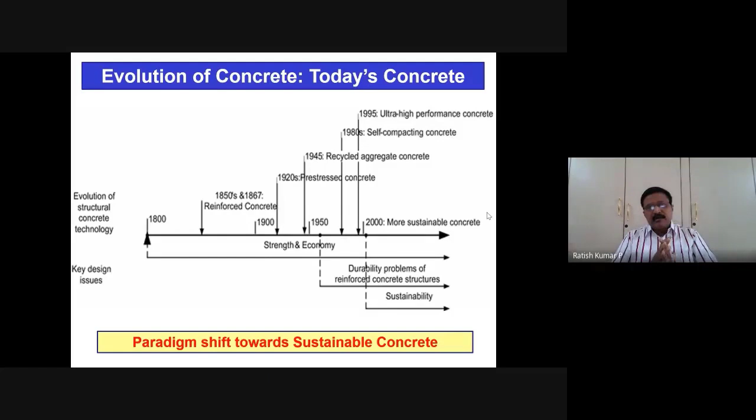Okay. So all I want to say at this point in time is that there is a very good paradigm shift from a strength-based design to durability-based design to a sustainability-based design, and all these three things are going to form something like different vertices of a triangle. Like, the strength is important, the durability is important, the sustainability is important, but I don't say it's an equilateral triangle though. Okay, so let's just go further.

Now, the definition of sustainability, as everybody starts with it, I just try to put in my point from the sustainability point of view. We know that a very common definition of sustainability is the development that meets the needs of the present generation without compromising the ability of the future generations to meet their own needs. So this is a very prominent and very common definition, which is from the Brundtland report. So if you talk in a very common man's language, it is something like जियो और जीने दो.

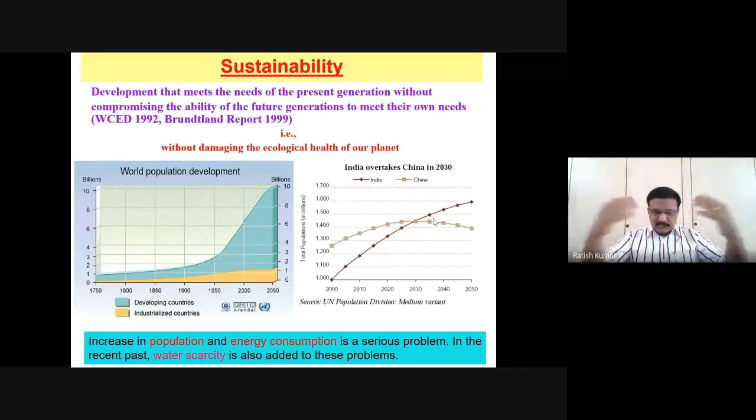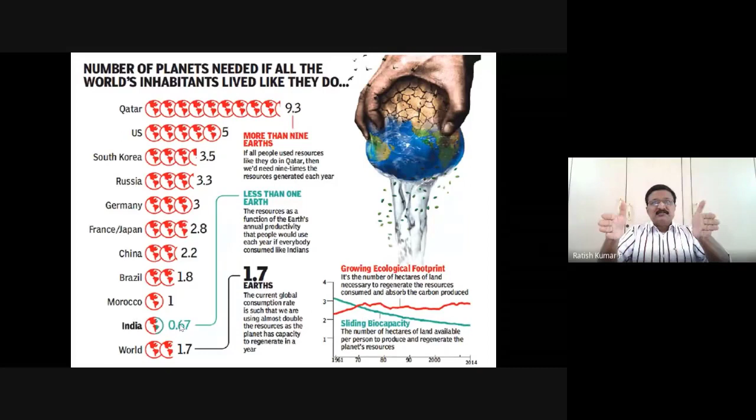So it's very important that we think about ways and means of reducing the embodied energy or the carbon footprint which we are creating with respect to all our practices, be it burning of fossil fuels, be it cement, be it air conditioners, be it all the different aspects. I'll come to that a little later.

Now let me talk about the embodied energy. Embodied energy is the energy which is required to bring a particular product into the market. Be it concrete here, as you can notice, be it steel or be it ceramics, it all depends upon how much energy you are expending to bring this particular product into the market.

And you can see straight away that if I'm talking about concrete, for example, the embodied energy of concrete is something like 220 gigajoules. That's a good number. If you see steel, it's 140 gigajoules. If you see ceramics, it's around 80 gigajoules. But if you see glass, it's less than 50.

But the point is, are we really ready to make an alternative to concrete? Can we completely do away with concrete? That is a question I'm trying to bring forth. Yes, the embodied energy seems slightly high, but when I calculate it with respect to the same amount of usage for aluminium or timber or anything like that, what will be its role? Let us bring that forth a little later.

Now, in addition to that, there is also an important concept called cradle to cradle or cradle to grave, which is something like circular economy. That's a very important aspect today whenever we talk about the concept of sustainability.

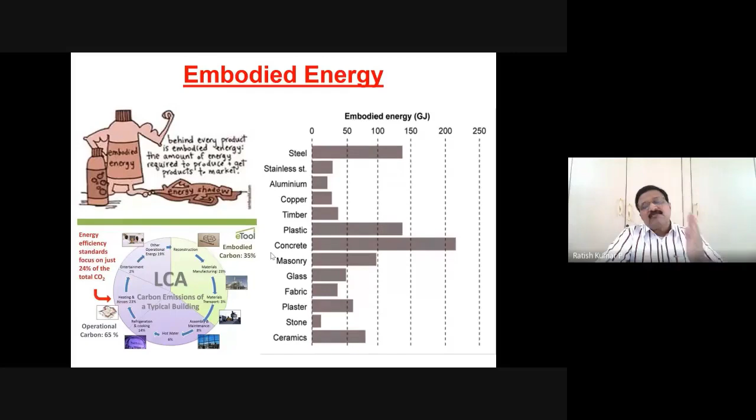And it is going to change with the topography. So it's very important that we develop our own embodied energy calculation for the materials which are available in our country. That's a very important aspect one has to keep in mind, a gray area of research for young budding engineers. Let me go further. Now, as far as the construction output is concerned, let me project the Indian scenario.

We are really growing very fast, and our country will be the second largest country in construction growth, I think, next to China. Because of the large population, the infrastructure growth is going to be there, and to tackle the growing needs of this population, the infrastructure grows, and when infrastructure grows, it also demands material.

So that's the point of confluence and juxtaposition which I'm talking about, with respect to the use of materials vis-a-vis the strength, the durability, as well as the sustainability. Now if you see our National Planning Commission, we have allocated something like close to $1 trillion for the next 5 years for the growth of infrastructure development.

There are several schemes which the government of India is coming up with with a very positive attitude. You might have heard about schemes like Amrut and Hriday. We have Pradhan Mantri Gram Vikas Yojana, Awas Yojana, and the topic itself we are talking about is smart cities, heritage cities. There are several other things like Swachh Bharat Mission. These are all going to give a good impetus to the entire growth of the nation.

And the entire growth of the nation is dependent upon the growth of infrastructure, and the growth of infrastructure is going to pose several challenges to us. We civil engineers are part and parcel of this growth, and that's why we are worried about the different ways and means of reducing the amount of carbon dioxide and the toxic substances we release to Mother Earth, so that the carbon footprint can be minimized. That's our idea.

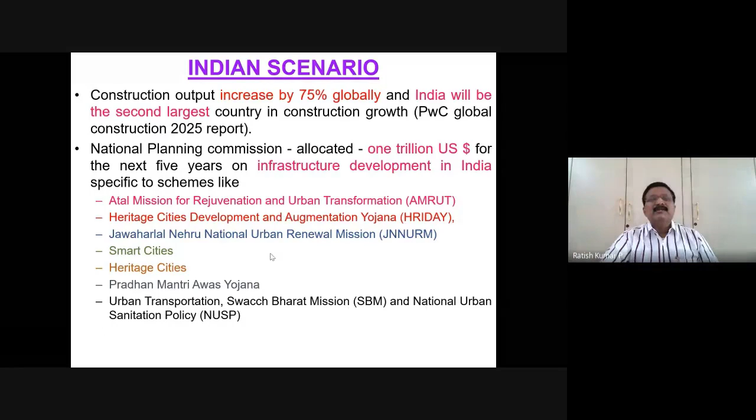Now, let me talk a little bit about cement production. Of course, you might have studied the production of cement. Some students are there, some research scholars are there. I just want to very briefly talk about this aspect. When you talk about cradle to cradle or cradle to grave, the production of cement passes through several stages.

We talk about argillaceous and calcareous materials, pre-calcination, and then the grinding and heating of these materials in the rotary kiln, passing through several temperatures: around 850 degrees centigrade for belite formation, 1300 to 1350 degrees centigrade for alite formation. The point is that in raw material preparation, a good amount of energy is expended. You are quarrying the limestone, which is a very important aspect.

As everybody knows, in clinker production the argillaceous and calcareous materials are burnt in the rotary kiln to a high temperature, and what comes out of the rotary kiln is called clinker. Then you quench it, take it to the ball mills, add certain performance additives along with gypsum, and you get the final finished product. So there are several stages involved.

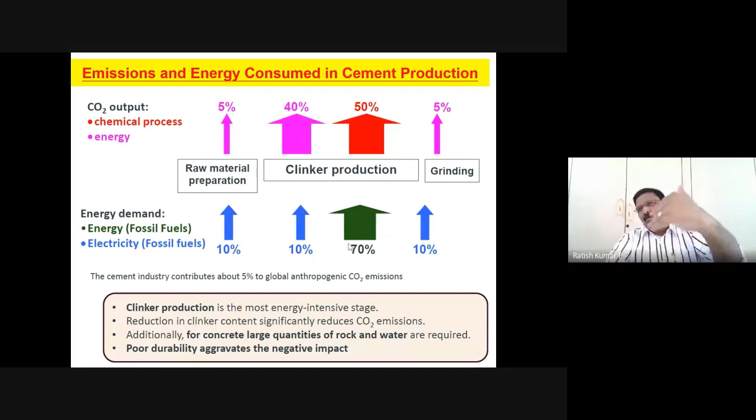So that's where we can try to put a check on the energy demand by probably reducing the fossil fuels, which are to the order of 70%, and then we can try to think of a replacement of this 70% with other waste wood or rubber tires, etc., in the rotary kiln for burning the materials, and probably we can try to get a good advantage.

Let me just try to go to the next one. If you see India's projected demand by 2047, you can notice that the total energy demand, for example, by 2047 is a good 18,125 terawatt hours. Now, the point of interest for us is, the buildings are occupying a good 2,287 terawatt hours, which includes everything.

It includes commercial lighting or heating, residential heating, etc. It involves all these things, and a good amount of energy is basically expended in the building. So can we try to put a check on this by using sustainable materials and sustainable technologies? This is the point of discussion in several levels of platforms where sustainability is being discussed.

At the same time, let me also try to project the demand for cement production. As you can see, the demand for cement production is from something like 450 to 600 million tons, a lower level of 450 million tons to upper level of 600 million tons. By 2050, the demand for cement is actually growing to 780 to 1360.

But the point is, as you can notice here, there is a huge increase in demand, and that's because of the increase in the growth of infrastructure, which should match the population requirement. This particularly is not so much in the OECD countries, but the demand for cement is more in China first, and then India. India is a developing country, so obviously we require a lot of cement. So that's the point here.

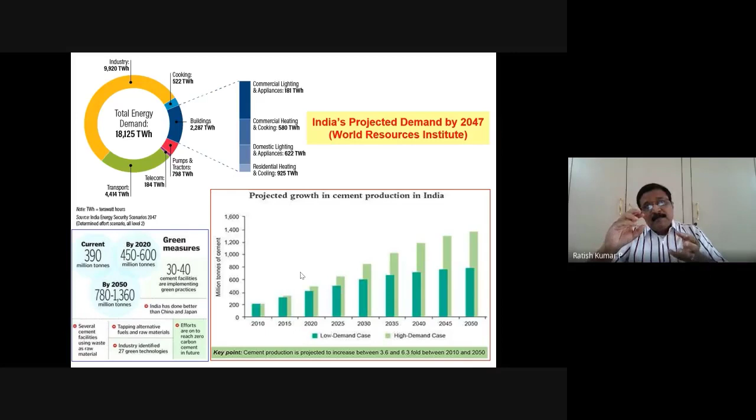But the important point I also want to say is, if you see the statistics I was presenting from the carbon footprint point of view, India is doing better. In fact, when compared to China as well as Japan, as I told you, our carbon footprint vis-a-vis the amount of 1.75 times of Earth, if you compare, ours is 0.67 times. Which means we are not really very low, but it's an alarm which should actually grow. But definitely we are better compared to the other developed countries. So that's good news for us.

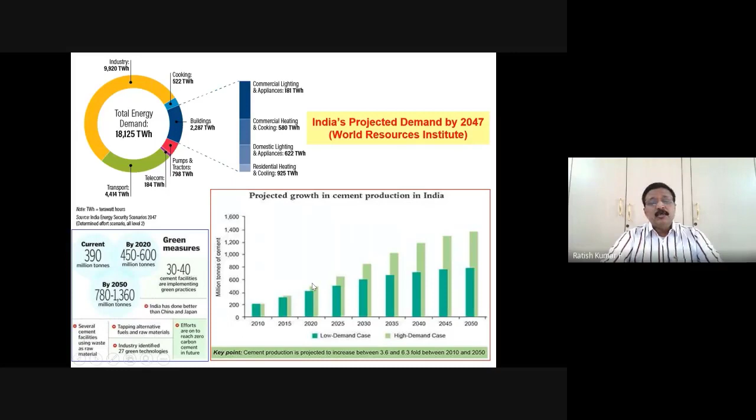Now, I said there is a growth of so much demand for cement. Yeah, that is true, because the growth of infrastructure is very high. But the point is, can we really look at the use of cementitious materials? You can see that cementitious materials are going to make up a good 30 to 50% of everything we produce. And as against wood, for example, as against ceramic, they are occupying very low amounts as compared to the amount of materials production per year. But this is because cementitious materials are occupying a very good role.

So can we really do away completely with cementitious materials? Can we really construct everything with wood? Can we really make everything with ceramic or iron or anything like that? The answer to this is a big no, because it's not possible. Wood is not available everywhere, and the material production of wood compared to cementitious material is very low. But the important positive point to notice is that the carbon dioxide emission, even though we are using materials of the order of 30 to 50% of everything we produce, the carbon dioxide emission is only 5 to 10%.

As against the amount of cementitious materials we are trying to use, the carbon dioxide emission is low, only 5 to 10%. So I don't think it's really a problem just from the use of cementitious material. There is also a concentration which has to be done for the production of carbon dioxide from other sources, not just cementitious materials. So the summary of this slide is that as against the requirement of our cementitious materials, the amount of carbon dioxide emissions is not very great.

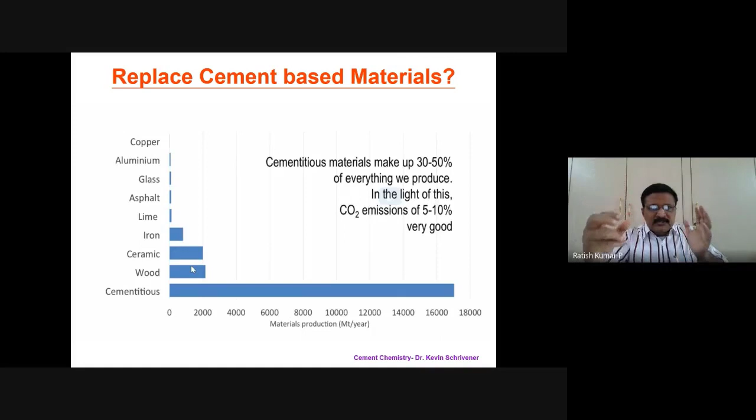Let us try to come to the several challenges which the concrete industry is posing. Let us summarize what we talked so far. I've already told you that the population is continuing to increase. At this point in time, our population is 7.8 billion, for example, and we are going to go up to something like 10 billion in 2050. Our role is something like 17.74% of the total world population.

So to match this population demand, the infrastructure needs are going to grow. There are many constructions which we cannot destroy every time and then go for new construction, because the capital expenditure would be huge. So there is also a very important aspect of concentrating on aging and deteriorating infrastructure. Can we really go for repair and rehabilitation of these structures so we can put less stress on new construction, because capital expenditure becomes very huge if I always go for new construction? That's the second challenge we have.

So the first challenge is basically the population. The second challenge is to match this population - first and second are interrelated, so infrastructure needs should grow. When we say growth in infrastructure, can we think of opening a new area of repair and rehabilitation of aging and deteriorating infrastructure? But mind you, the repair and rehabilitation should not be at the cost of losing the benefit we're trying to achieve. If I'm doing a repair of a structure that can last only 2 or 3 years, it's not worthwhile. So that is where engineers have to take a decision.

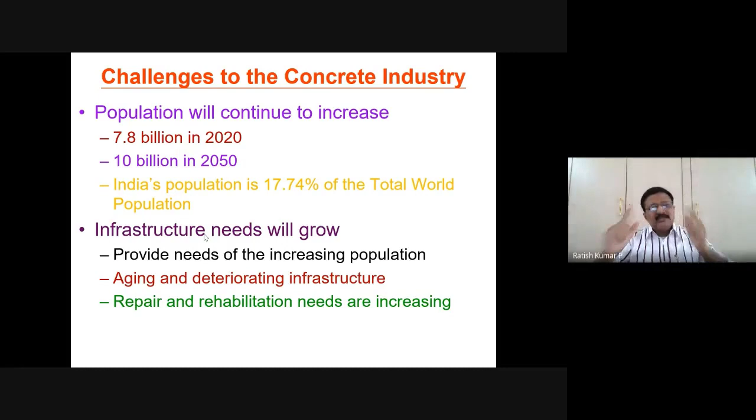The third challenge to the concrete industry, or we concrete technologists and engineers working in this area, is that natural resources are becoming extinct, so non-renewable energy is becoming scarce. It's high time we think about alternate ways and different materials. One thing I told you clearly is that cementitious materials are here to stay - we cannot really think of an alternative to them because they are produced cheaply and they don't give that much carbon dioxide vis-a-vis other things. I will try to show one more comparison. But the point is that natural resources are getting extinct.

So one has to think about ways and means of producing concrete using other materials, be it from the point of view of replacement of cement, fine aggregates, or coarse aggregates. It's very important - concrete has come to live with because it's a beautiful, sustainable, and versatile material. So we have to think about how best I can make concrete using other materials. That is the third challenge here.

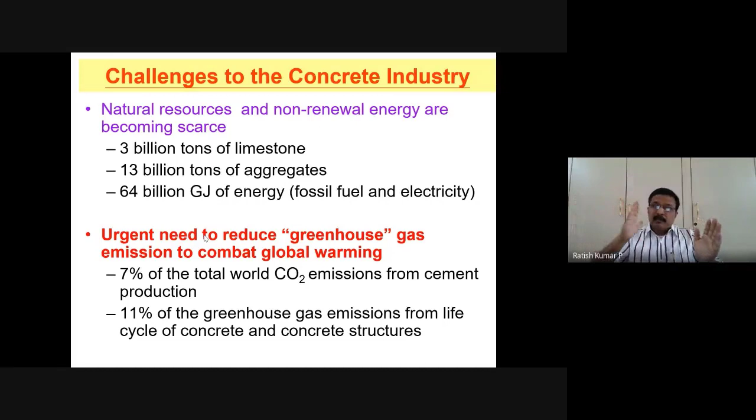The fourth point is, can we really think of reducing this carbon dioxide also? Because it's not just about the amount of cement increasing as infrastructure growth increases. When you compare with aluminium, the amount of embodied energy in an equivalent sense for concrete or cement is going to be very low. But the point is, it's very important to think about the fact that we are talking about large amounts of cement use. So can we really think about reducing this also to some extent? That's the summary I want to convey.

There are 4 or 5 points here. One is that cement concrete is a widely used material - there's no doubt about that.

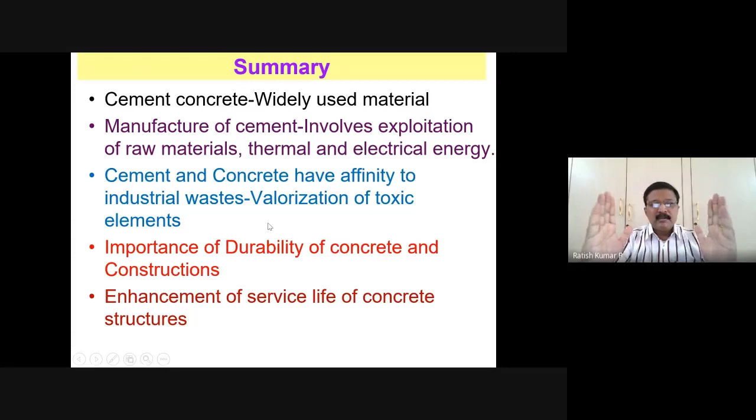There's no replacement for that. In the manufacture of cement, can we really think about alternate ways of using anything other than fossil fuels, so that we can try to valorize these toxic elements? We also have to think about the use of supplementary cementitious materials, because they have a very good affinity with cement and concrete. One has to think carefully about any supplementary material available in nature—just mixing it into concrete to develop something new isn't the point. It has to develop the requisite strength, we have to concentrate on durability, and we must also consider the service life of the concrete. Can we enhance the service life vis-a-vis durability, and create a good amount of sustainable material?

Now let me go further. One thing I was trying to talk about in the summary is whether concrete is environmentally friendly. I was stressing the same point earlier, and I'm trying to compare it here.

When we talk about sustainability, there are four different points. At one time we used to talk about a triple bottom line approach—social, economic, and environmental. Now, from our research and latest developments, we try to bring in another leg: the technological aspect, which is important from the point of view of valorization of carbon dioxide.

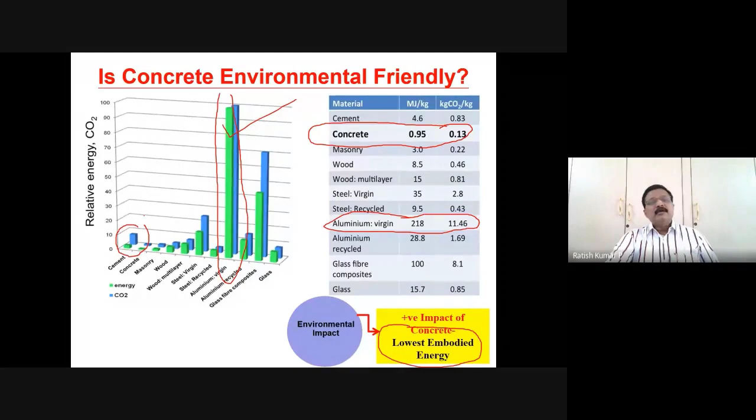So can we really do something to reduce the carbon dioxide footprint? That's what I mean when I say the environmental impact of concrete is that the embodied energy is low compared to aluminum. I'm pointing out clearly here: concrete is here and aluminum is here, which means the embodied energy is actually low compared to aluminum. But where's the catch here?

This calculation is from the point of view of megajoules per kilo, which is fine from a weight perspective. But we have to understand that we're producing a huge amount of cement, because the requirement has increased. The population has increased by three times from 1950 to today.

And the amount of cement requirement has increased by 34 times, which is very huge. This requirement is more in the case of China and India, because they are growing countries, whereas there's almost constant growth in OECD countries. This means the large amount of cement requirement is basically taking place in China and India. That's why you find many cement manufacturing units in India and China—our requirement is much more compared to other countries, because ours are growing countries with high population and infrastructure growth.

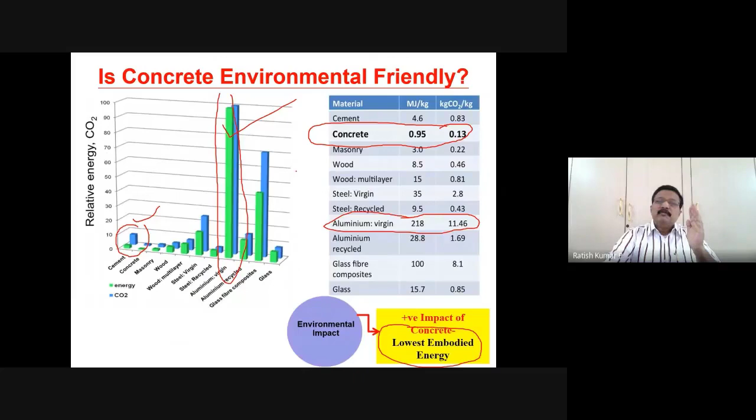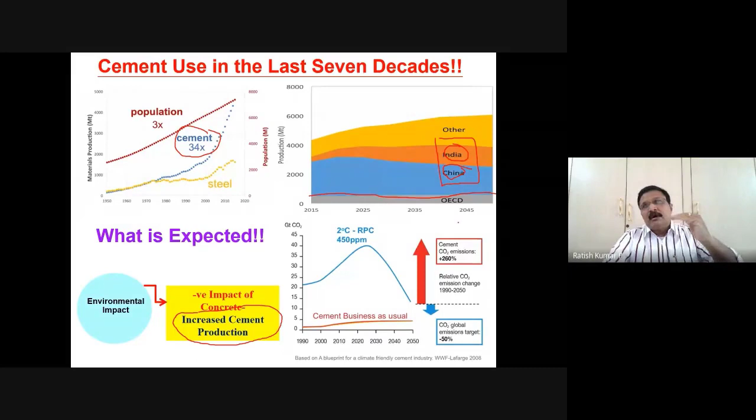So that is what is actually bringing me to the environmental impact from the negative point of view: increased cement production is what is actually required. So though the amount of what I call the embodied energy seems to be low as compared to aluminum, because our demand for cement is increasing, we really have to keep a check on ways and means of reducing the carbon dioxide by thinking of alternate materials to cement. Can we really think of supplementary cementitious materials or something like that, so that we can keep a check on the amount of carbon dioxide which is developed because of the production of cement?

Now, is there any alternative for that? As I already told you, there's no alternative, because cement basically requires the various oxides in the form of calcium oxide, silicon dioxide, and alumina. And can we really think of other materials? The answer to that is that if we compare the composition of cement with respect to the Earth's crust, particularly 8 elements are going to dominate. As you can see, oxygen, silica, alumina, ferrous, calcium, sodium, potassium, magnesium.

All this is basically contributing to something like 98%, whereas the rest, like sulfur and all other things, are contributing only 2%, which obviously means that the type of elements available in the Earth's crust, or even if somebody is interested in understanding the elements in other planets, you can see by and large, all these planets, including the Earth's crust, comprise elements dominated by these 8 elements. Something like 98% are dominated by these elements.

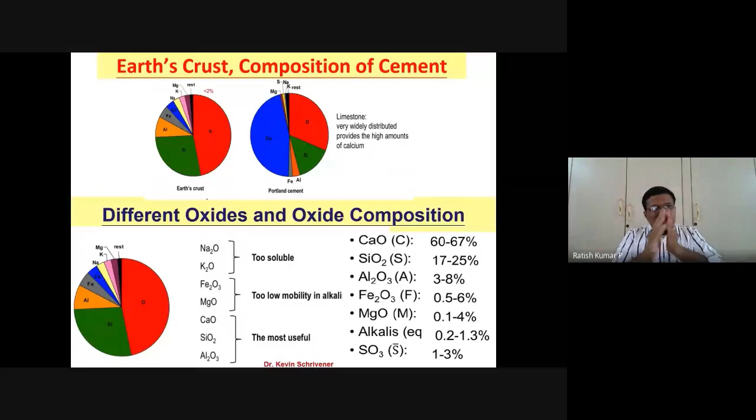But out of these 8 elements, when you compare the elements which are possible to be used in Portland cement, for example, you can see sodium oxide and potassium oxide are too soluble, so they directly dissolve, and then they cannot precipitate and cannot make a very good binding material. And when you talk about, for example, ferrous oxide as well as magnesium oxide, once again, they are too immobile. That means they don't properly combine and mix, and they just stay like ground mass at a particular point. That is what we can understand by seeing the scanning electron microscope images also.

Now, what is left with us are the three, which are calcium oxide, silicon dioxide, as well as aluminum oxide, which we remember are called calcareous and argillaceous materials. And they are the most useful because they form the so-called Bogue's compounds, which are tricalcium silicate, dicalcium silicate, tetracalcium aluminoferrite, as well as tricalcium aluminate. So what I want to bring out at this point in time is: are there any alternatives to produce the cement? The answer is no, because the Earth's crust is basically comprising these elements, which are occupying 98%.

Out of these elements, if I try to make the oxides, out of sodium oxide, potassium oxide, ferrous oxide, magnesium oxide, some are not possible because either they are too soluble in the alkaline material, not really making a precipitate for a good binding medium, or, since ferrous oxide and magnesium oxide are basically not mobile, calcium oxide, silicon dioxide, and alumina are the only option. They stay at one point.

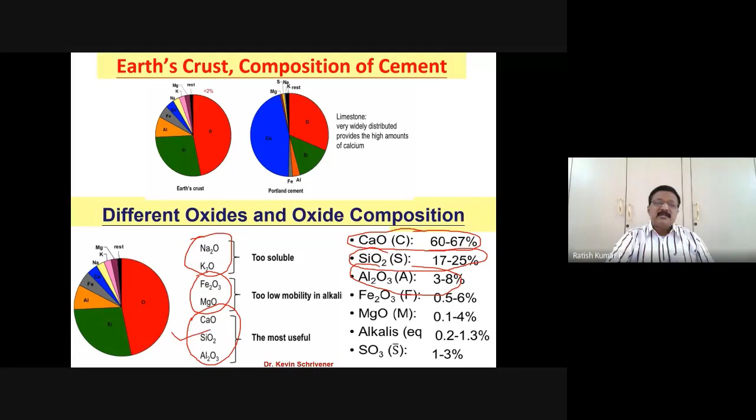So that actually forms the major phases, that is the tricalcium silicate, which is about 60%, which is also called alite, and which is mainly responsible for the strength in the concrete. The dicalcium silicate, which is called belite, is responsible for the strength in the concrete, but also good from the durability point of view.

The third one is called celite, which is actually tricalcium aluminate. And then the fourth one is called tetracalcium aluminoferrite. This tetracalcium aluminoferrite, as well as tricalcium aluminate, is very important for the initial heat burst. Sometimes we get a very quick setting or false setting, and this is very important, particularly in materials like geopolymer concrete, where you might have noticed that the setting is going to be very fast.

What I want to say at this point is, Bogue has given some equations, and I'm not interested to give those equations because they are not really useful at this stage, because when Bogue gave the equations, the supplementary cementitious materials were not there. He was talking only about the simple cement making materials. So that's why it's not really relevant at this point. So we can think about investigating it from the microstructure analysis, and then check what is an active material and what is important for binding, etc.

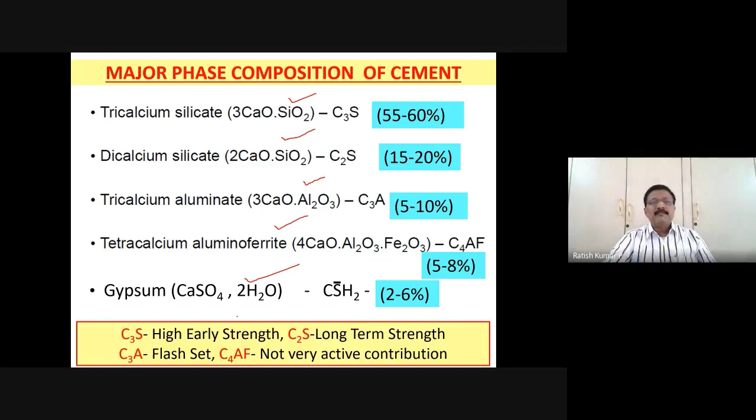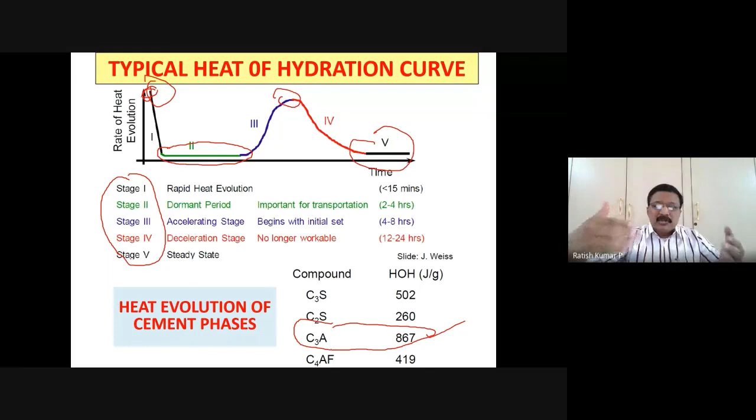And then of course the next is tricalcium silicate, the next is tetracalcium aluminoferrite, and the next is dicalcium silicate. Tetracalcium aluminoferrite is responsible for the grayness in the cement. That's the reason.

But the point here is, are we really able to get a good advantage from the carbon dioxide point of view? That is a question which we try to actually point out.

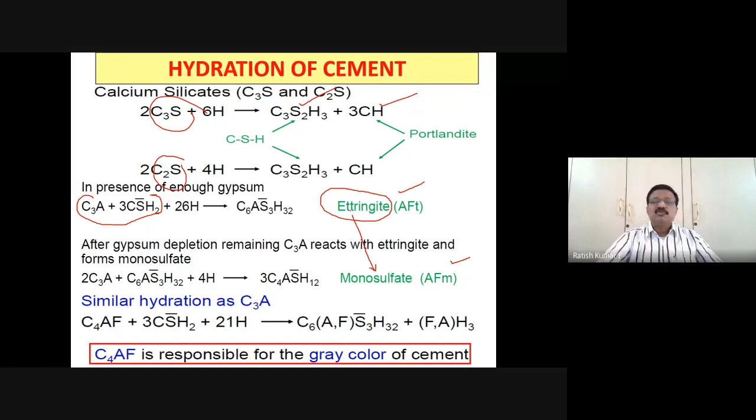Because ettringite, which are the needle-like crystals, tend to grow in size and they break the interfacial transition zone between the CSH, the cement phase portion, and then it creates cracks, and then it creates very large durability problems. We'll try to see that.

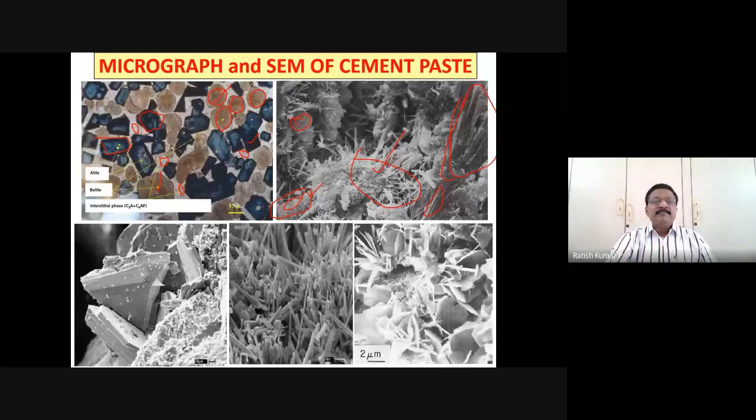Okay, I think this is the same thing you can notice here. For example, the CH, or the gel, which is CSH, or the needle, which is ettringite. These are certain CH, as well as this is CSH. So that's what you can notice here.

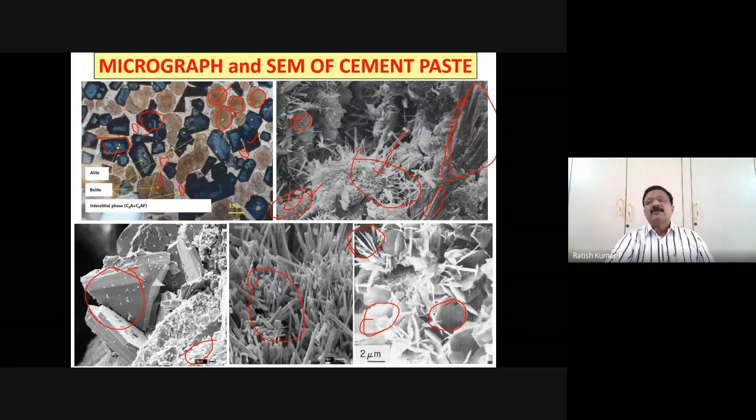If you try to understand the interfacial transitions or the different phases, if you want to really see the texture, atomic force microscopy is very important to understand the texture and the type of CSH. For example, at the nano level, you can get the details about the hydration products. If you go to the micro level, you can try to understand the mortar phase, the paste phase or the aggregate phase.

If you go to the meso level, basically you take the cubes and try to understand the concrete. And if you want to really check the performance of the entire material, we go for what is called the macro level, that is testing elements in the form of beams or columns or something like that. So at every stage you can see and understand the different phases of concrete.

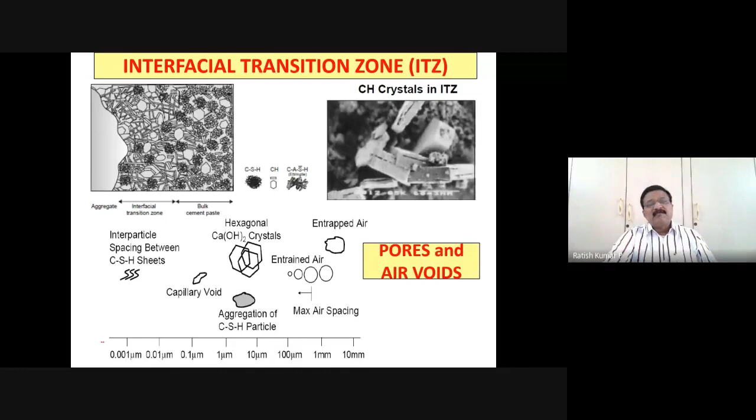So if you really want to understand a good texture of the CSH, go to atomic force microscopy, or with microscopic examination you can get the mortar phases, paste phases or aggregate phases, because they are of different sizes, as you can notice here. Okay.

Now, once again, I'll put a break at this point, and I will say that what we have really tried to identify is the juxtaposition from the strength and, to some extent, the deterioration point of view. And then it's very important to identify that there is a need to find alternative materials for the cement, and what are the different materials I can think about. That should be cost effective, environmentally friendly, durable, and sustainable.

And then I also have to think about whether I can use different types of industrial waste materials; that is one question I have to think about. And then what are the different advantages I'm going to get from the point of view of impermeability, so that if the porosity is less and I'm trying to make a very dense type of concrete, the ingress of harmful chemicals will not take place.

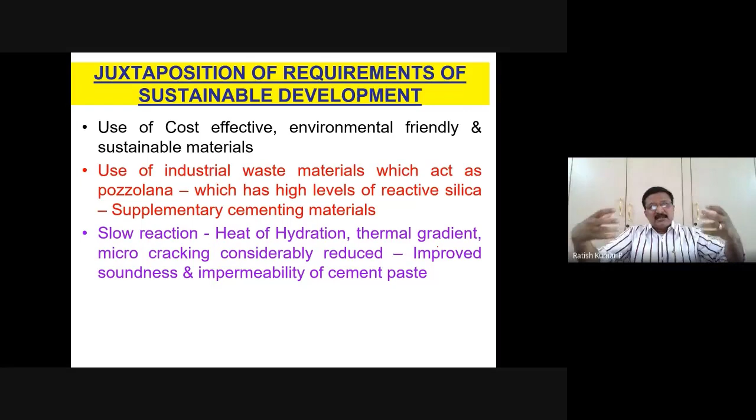If the ingress of harmful chemicals like carbon dioxide, oxygen, water, chloride ingress or sulfate attack takes place, that is going to have a very bad impact from the durability point of view. So I have to think about all these things when I really start trying to select a material. Okay, that is what is in my mind.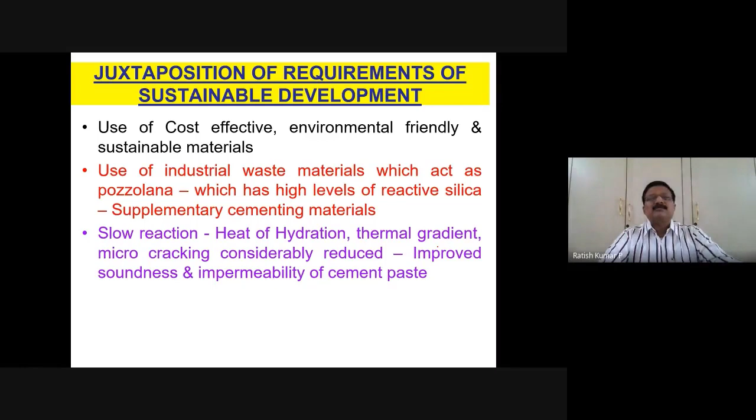Now, very quickly, I will try to pass through the supplementary cementitious materials which are greatly available. There is limestone, there is fly ash, there is slag. I'll try to talk very briefly about each of them. When you talk about limestone, limestone is basically from the quarry, and as I already told you, this is the basic raw material which is important for the production of the cement.

Yeah, someone wants to ask some question. Hello. Hello. Rajesh? No, sir. No one raised the question, sir. Okay. If there are any questions, you can please ask me. You can mute it, please. So I request all the participants, better we can mute that. We can have an interaction session at the end of this lecture. 1 or 2 questions, please, from the participants. Sanjivani, I think you raised that. Do you have any question to ask? I think it's a mistake. Okay, so we can continue, sir. Can I continue, or is there any question?

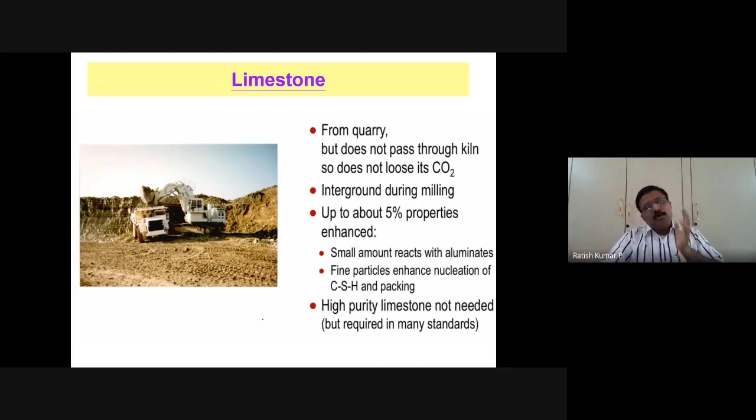At the same time, I can valorize it, because I can reduce the amount of carbon dioxide which is otherwise produced in huge amounts when I burn the same thing in the rotary kiln. So that is one point of research which is actually going on. That's what I mean to say about limestone.

And when you talk about fly ash, for example, yes, there is a good amount of research which is going on in fly ash, but mind you, one has to be very careful that you cannot really go for high volume fly ash, particularly when people are using of the order of 60%, 70% like that. It's also having a very dangerous point.

If the calcium oxide is more, it's also going to produce calcium carbonate, which can actually reduce the alkalinity in the concrete, can improve the acidity, thereby the pH value decreasing to less than 8 or so. Obviously, when the acidity increases, the alkaline passive layer which is there on the steel is going to get broken. It becomes active for corrosion. So that's one point.

Of course, there are very good advantages of fly ash, and there is also an abundant amount of fly ash available as compared to the slag, not as compared to limestone. Now, it's good to use up to 10 to 15% because the workability is going to be high, but the durability is also going to increase because it can also go as an infill, so it can actually close the pores. So it can definitely serve the purpose of improving the durability.

But the point here is the reaction is going to be slow because it's having lower amount of amorphous proportions. So that's the reason why we get a late gain in strength. In fact, more crystalline means it is less reactive. So it's less amorphous; a lower proportion of amorphous material is available. So my recommendation is go for 10, 15%, 20%. At the maximum, you can try to go for 30% in case of fly ash.

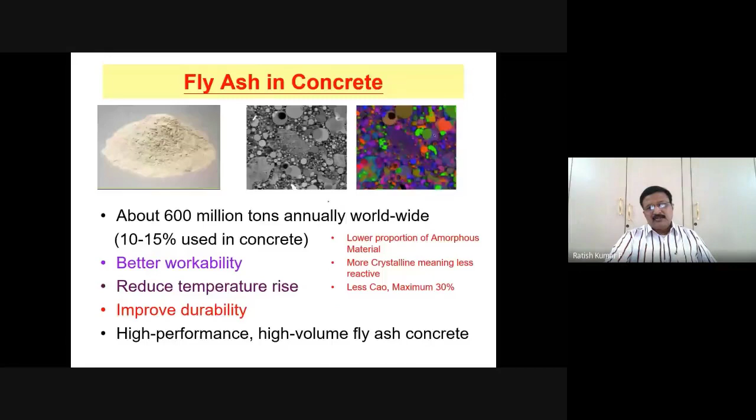The third material which I'm talking about is slag, for example. Slag is also very good. It comes from the blast furnace. In fact, it is produced in 3 different stages. The air-cooled slag and the expanded slag are the 2 things which can be used to develop lightweight aggregate, as well as be used as an aggregate.

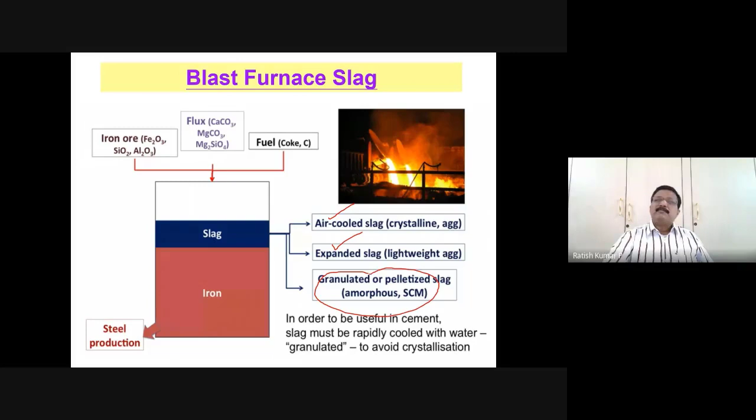But what is important from the point of view of supplementary cementitious material is the granulated or ground granulated blast furnace slag, and that is actually good because it is having a very good amorphous nature. It's 90 to 100% amorphous, which means it's a glassy particle. It's highly amorphous, and that is the reason why the reaction is going to be very fast.

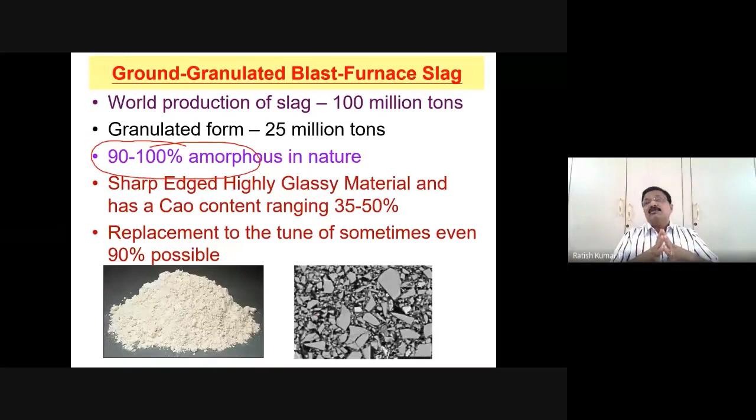In some cases, you can as well replace cement with a good amount of slag because it's going to take an equal role as that of cement. So that's why 35 to 50% replacement can be done. Sometimes you can even go for 70-80%, but it depends on the type of slag. But the bad news is that the amount of slag available is actually very less in the world. So that's one point, though it is having very good properties.

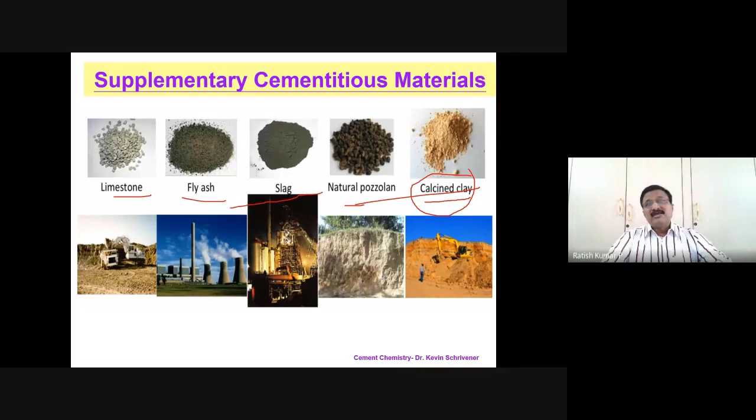The other thing I'm talking about is the natural pozzolan. Natural pozzolans are available in plenty. People are using vegetable ash like rice husk, etc. A lot of things are available. And the other thing is calcined clay. This is the LC3 cement, limestone calcined clay cement. Plenty amount of calcined clay is available. I think this is one area of research people can take, and then we can really get a good amount of valorization, because plenty amount of this is available.

So the one point which I was trying to talk about is the advantage or disadvantage when going for belite type of cements. The amount of chemical carbon dioxide emission, if you compare these two, is 512 against alite, if you want to replace, which is only 579.

That means I'm not really getting a very good amount of benefit from the point of view of using belite cements as compared to alite cements. So that is why, though belite cements can be used, I feel that because you're not really getting a good advantage from the point of view of reduction in carbon dioxide, it's not really that much useful from the point of view of sustainability.

So that is what. But on the other hand, we have periclase here, and we have other things like yeelimite. If you have a triangle like this, where you can put silica here, calcium here, as well as alumina here, what we are concentrating on is this particular area. But somebody can concentrate on this other area also, where you can think of a material like yeelimite, where you can get calcium, alumina, as well as sulfur.

As you can notice here, this is sulfur, not silicate. So you can probably avoid silicate and reduce the amount of calcium silicate by going towards this particular end of the triangle, making use of calcium as well as alumina and a certain amount of sulfur, staying on this particular side. The advantage is that you definitely get a reduction in carbon dioxide, because you are not really using a large amount of the reaction of calcium oxide plus silicon dioxide. But the point is, the type of alumina you have to use should be rich in bauxite. Bauxite is very costly and it is a very rare material which is available, and that is the reason why more concentration is on these two rather than going to this particular side of the triangle.

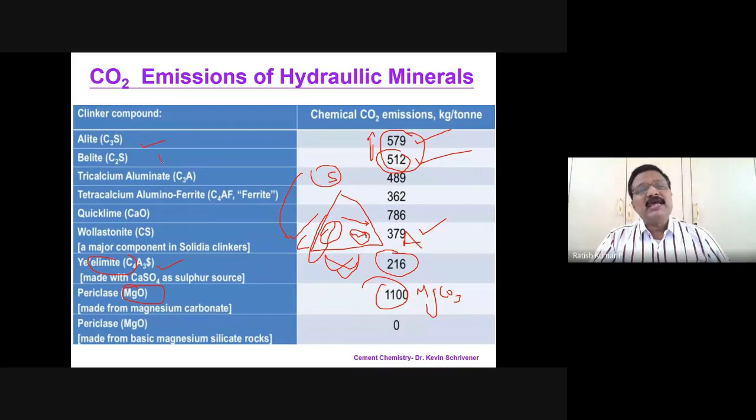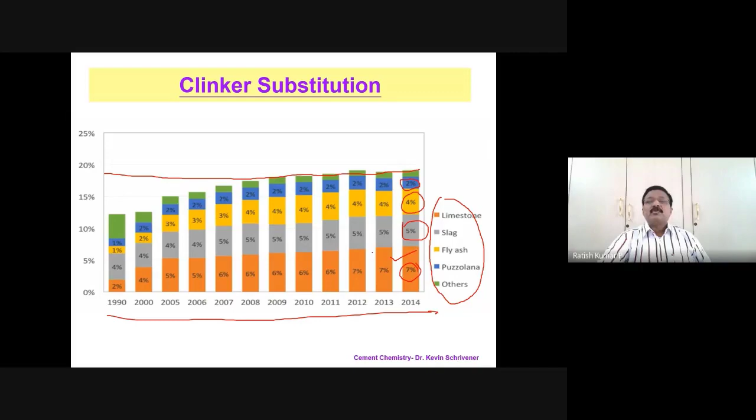And you just go to this slide, we talked about this, yeah this slide. As you can notice, the amount of slag available is very less, about 8%. We require a greater amount of fly ash and slag, but the amount of slag available is less. We require to use a lesser amount of fly ash, because these days we are talking about very high or quick setting concrete which has to give results in a very less time, but the amount of fly ash available is more. But the use of this fly ash should be reduced, there should be a check on that, otherwise there is going to be a problem. Slag can be used in greater amounts, but the bad news is that there is only 8% available across the world, and that is the reason why we have to think about binary, ternary, supplementary alternate combinations of these materials.

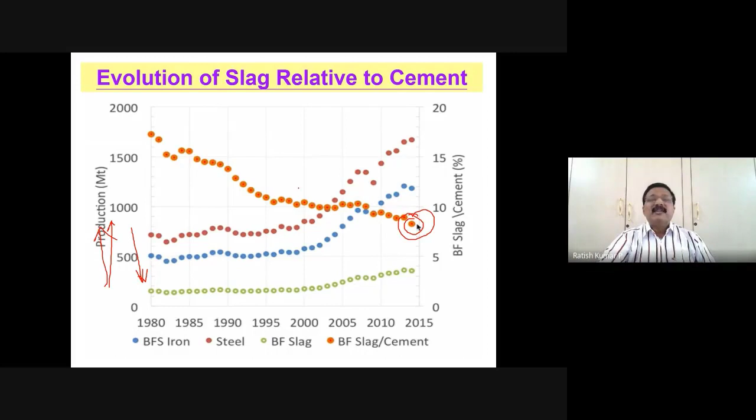That is how the concept of alternate materials or combination of materials has come. Silica fume is one thing which is also available. It has very good properties, but the amount of silica fume is also very less. As I told you, it has very good properties from this point of view. It can enhance very high compressive strength, and with an 8% replacement or addition in cement, you can get strength of the order of 80 MPa, 100 MPa also. But again, this is coming basically from ferrosilicon alloys, and the amount available is very, very less.

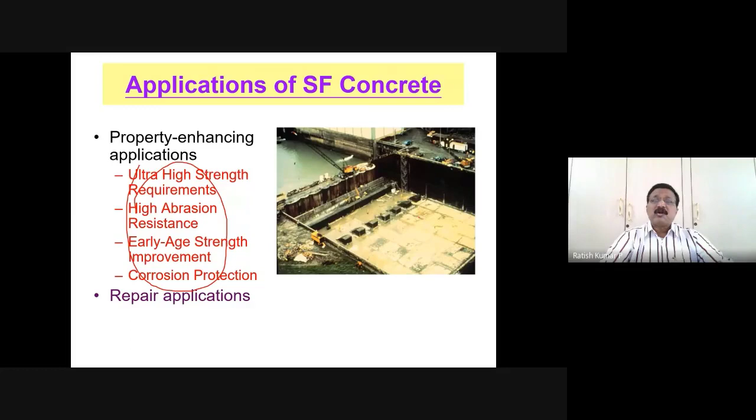But the point is that it's actually coming to be less. That's why today we are trying to combine slag and fly ash, or people are even trying to use fly ash plus other forms like rice husk ash, which is nothing but vegetable ash. Or people are trying to use a combination with waste glass as well as metakaolin, which is something like the clay type.

Now, what is available in good number as compared to Portland cement is the filler, which is nothing but calcium carbonate, and then also this particular thing, which is calcined clay. That's the reason why there is a lot of research going on in the area of limestone calcined clay cements, which you can notice.

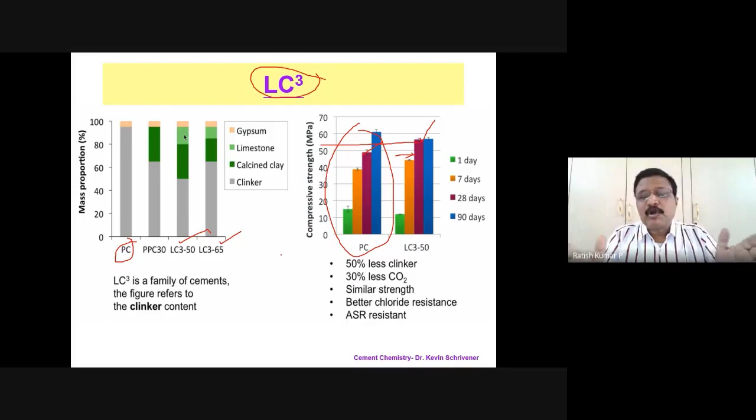So what I mean to say at this point is 50% of the clinker can be substituted with limestone, and limestone can be substituted with calcined clay to get an equal benefit, or in fact a better benefit, from Portland cement. So that's a good alternative we can think about.

Now let me try to talk about something else - another 15 minutes is left for me, or a little bit more. I'll go for 5 minutes more maybe. I think I will put a break at this point and then try to summarize.

I think we started our discussion right from the point of view of the definition of sustainability, and then very slowly we tried to go for: is there any alternative to cement? Why is the requirement of Portland cement there? Why only Portland cement? I said Portland cement or concrete cannot be substituted because concrete is a versatile material, and this is very, very important - it's actually producing 3 to 5% of the cementitious material's carbon dioxide output.

We saw it is about 3 to 5% only. So that's why there cannot be an alternative for concrete directly, because if I want to use the same amount of wood or steel or aluminum, the embodied energy is going to be huge - that's one point. The second thing is the scarcity of this material. So we have come to a very good conclusion that cement concrete is no material which can be replaced.

It's a versatile material. The only thing we need to think about is, because usage is increasing due to increase in population and infrastructure, we have to think of ways and means of an alternative to this cement. Hence, we talked about sustainable materials, or supplementary cementitious materials. The second point I want to talk about is we have to also think about it from the durability point of view.

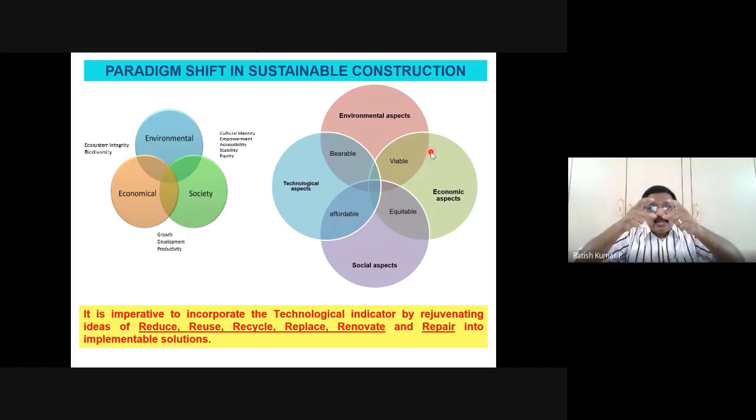Now we go for a quadruple bottom line approach because stability requires three sides, but a fourth side is required from the point of view of redundancy. So in addition to the environmental, economical, and social aspects, it's also imperative that you start thinking from the point of view of the technological aspect.

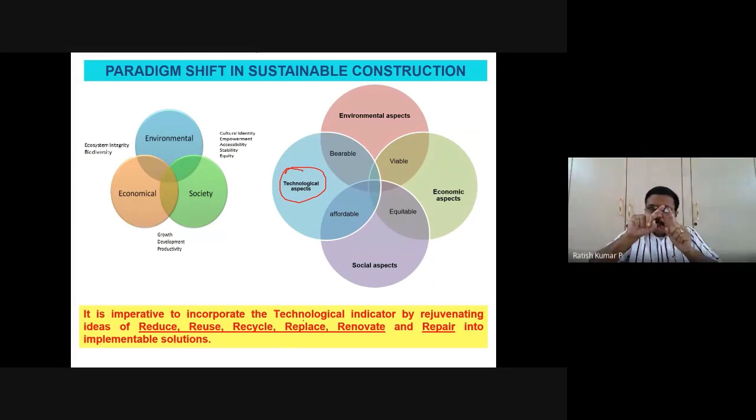And that is where the concept of reduce, reuse, recycle, all the 6 R's come in. And then you try to think about the concept of circular economy, right from cradle to grave, or cradle to grave to the cradle once again.

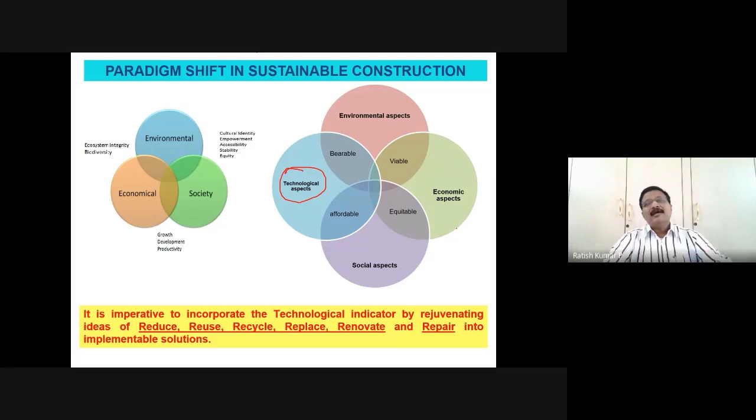So there should be an impetus on the technological aspect, which includes the performance vis-a-vis the strength as well as the durability point of view. So we thought it's important to actually have a fourth leg also.

So from that point of view, if you go to the quadruple bottom line approach, let me talk about the positive as well as negative impacts of each of these four different indicators, which are environmental impact. As we have already seen, the positive impact is that we can think about lowering the embodied energy.

But on the other hand, lower embodied energy—because I compared aluminum with respect to concrete and cement. The embodied energy with equivalent aluminum, compared to the requirement of cement, has a positive aspect as well as a negative aspect. The positive aspect is, as compared to metals like aluminum, definitely cement and concrete have a lower embodied energy. But as compared to—let me take a different color, please.

I'll take this one. As compared to the positive and negative impact, it's not just only the lower embodied energy, because we have to talk in terms of millions of tons of cement which we have used. So increased cement production is also going to have a negative impact on environment. The positive impact is, if we try to compare it with other materials, it is going to have a lower embodied energy.

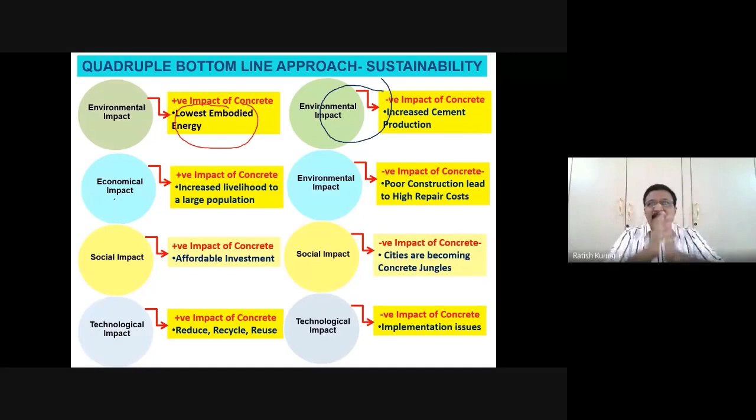Now, the economical impact is, cement and concrete are the bread and butter for any infrastructure, which means to say they are the basic material which is required. So that's why it is going to have a good impetus on the increased livelihood in population. But the negative impact is poor construction and high repair costs. Here it is not environmental, this is economical.

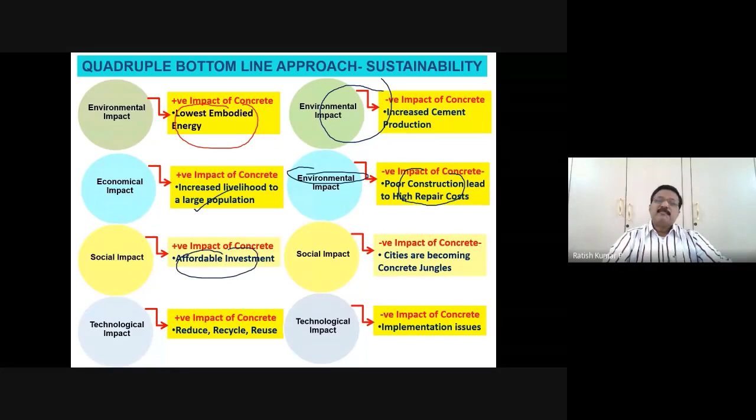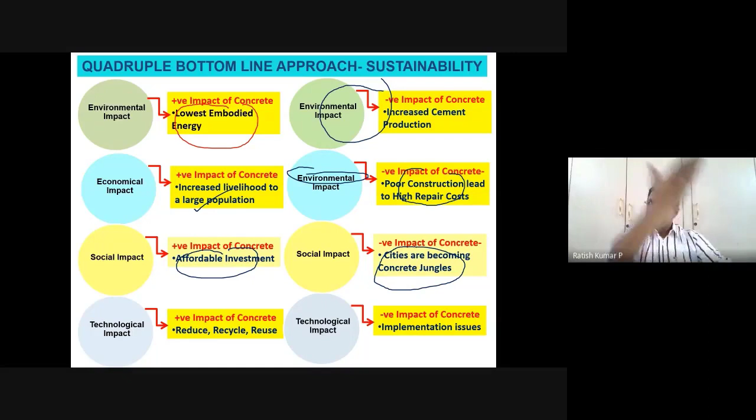Now, the social impact: it is going to produce an affordable investment, because concrete is going to be cheaper when compared to any other material. But the negative impact, once again, is that we are causing what are called concrete jungles, which is becoming inevitable because of the growth of infrastructure to match the needs of the population.

Now, technological impact. The Ministry of Environment and Forests or the Pollution Control Board these days are saying anywhere construction is going on, 20% should be replaced with recycled aggregate or construction demolition waste. So reduce, recycle, and reuse is a positive impact from the technological point of view. But the negative point is there are going to be implementation issues. Who is using this much recycled or construction demolition waste?

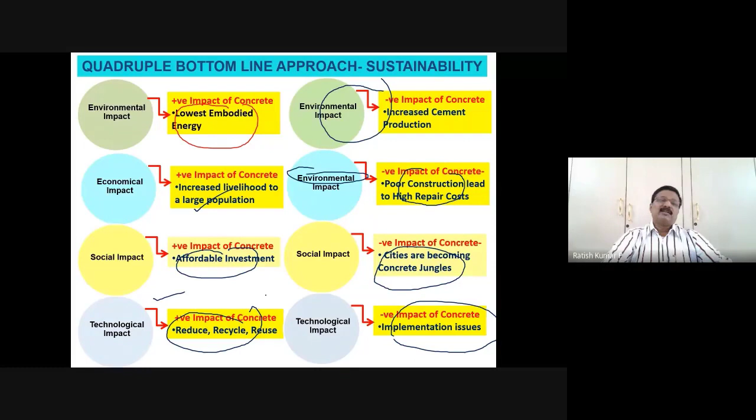Now, to this extent, with these 4 indicators, that is environmental, economical, technological, as well as social, we try to work out the different criteria which we can think about. The criteria which are common with respect to environmental, economical, technological, as well as social are brought about. In fact, there is a huge survey which is done. Let me just go to the framework first and then try to explain to you. So this is the framework.

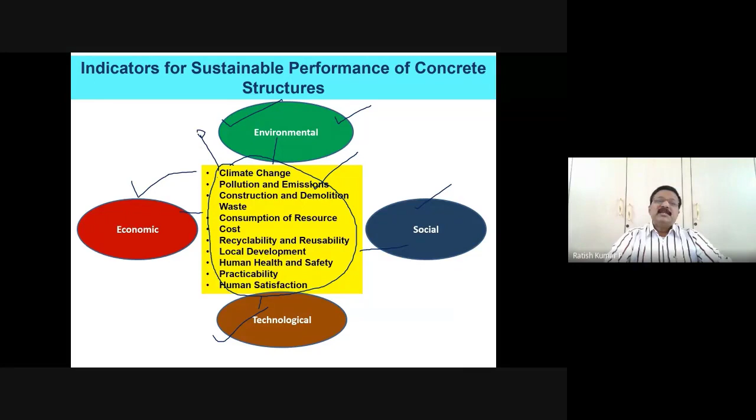Here, as you can notice, there are 3 things which I want to talk about. These are called the indicators. These are called the criteria. And under each indicator, we have certain attributes. So we try to weigh the attributes with respect to indicators, and the criteria with respect to the indicators. That's what I will try to show you.

Now these are the indicators on the horizontal line, and these are the criteria on the vertical line. We have tried to identify the different criteria here, as you are noticing: climate change, pollution and emissions, cost, recyclability, etc., taking into account all these indicators, which are environmental, economical, social, and technological, and then we try to see the weightage of each criterion with respect to these indicators.

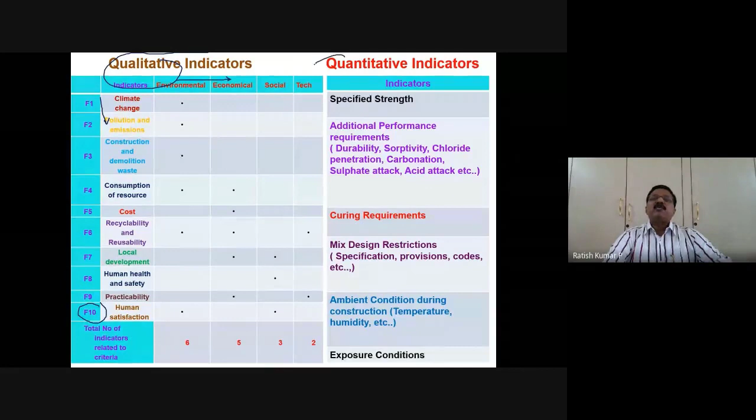That is not only being done from the qualitative point of view, by taking surveys of hundreds of people from different fields, like contractors, engineers, common users, and R&D industries, and then we calculate the relative importance index, and out of those 50 criteria, we bring them down to only 10 criteria, and then weigh them with respect to these indicators. That weighing we have done from the qualitative point of view, which is from the survey, and the quantitative point of view, which is from laboratory tests.

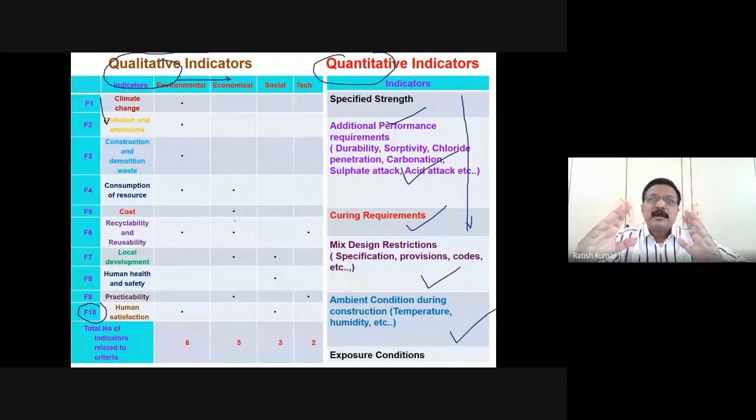So this is where I'm trying to say that the technological indicators from the point of view of strength as well as durability, as you can notice here, are going to be added to the social, economic, and environmental criteria, thus bringing in the quadruple bottom line approach for sustainability. So I'll just try to skip this.

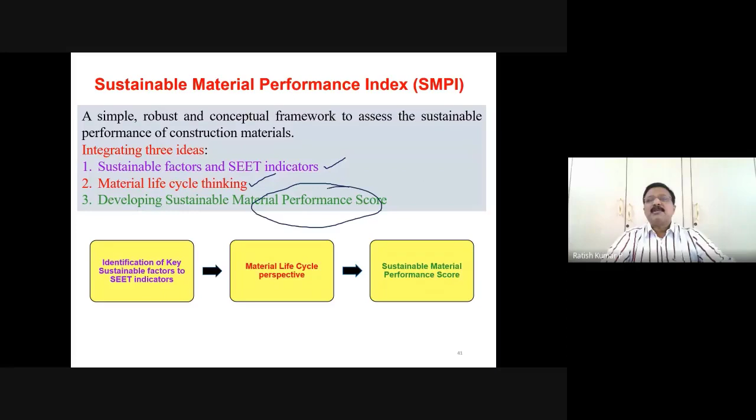So this is what we try to do. As I told you, the factors and indicators consider material life cycle thinking, and we try to develop a sustainable material performance score. I'll try to explain that. Basically, the main idea is to develop a building assessment tool, tools like GRIHA, BREEAM, or LEED, that sort of a rating.

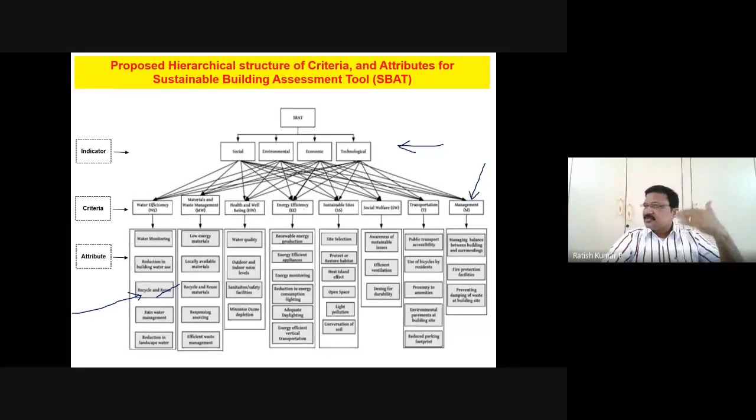Can we really think of developing a sort of tool and then a rating system using all these different indicators, criteria, and attributes which I just tried to point out? So the indicators are further paired using different methods like the analytic hierarchy process or fuzzy TOPSIS, etc. And then the criteria are weighed with respect to these indicators.

And each of these criteria has certain attributes. So we try to weigh these attributes with respect to the criteria, correlate these criteria with respect to the indicators, and then develop what is called a sustainable building assessment tool. I'll try to tell you how we did it. I tried to divide this into different portions. First of all, there is the qualitative part and the quantitative part, as I told you.

As far as indicators are concerned, we try to check whether we can identify the suitable criteria and the relative performance indicators by using a Delphi technique. And then we go for Cronbach's alpha to weigh the parameters of the criteria with respect to the indicators. When I say criteria, I mean water efficiency, materials and waste management, etc. And when I say indicators, I'm talking about social, environmental, economical, as well as technology.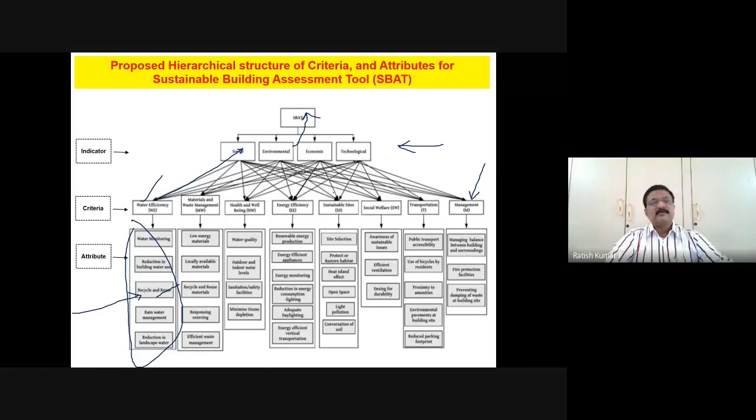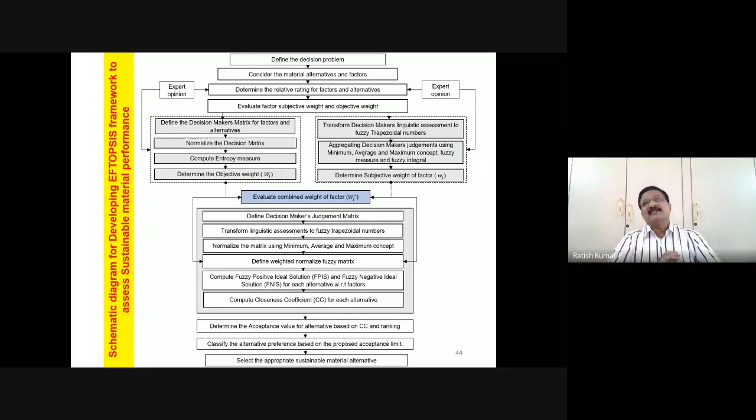All right. So let me just go here. Once we do that, we get an interrelationship between the indicators and the criteria. And because there are several objective and subjective functions, and several conflicting criteria in the judgment of these indicators and criteria, a fuzzy TOPSIS method has been used to select an appropriate material.

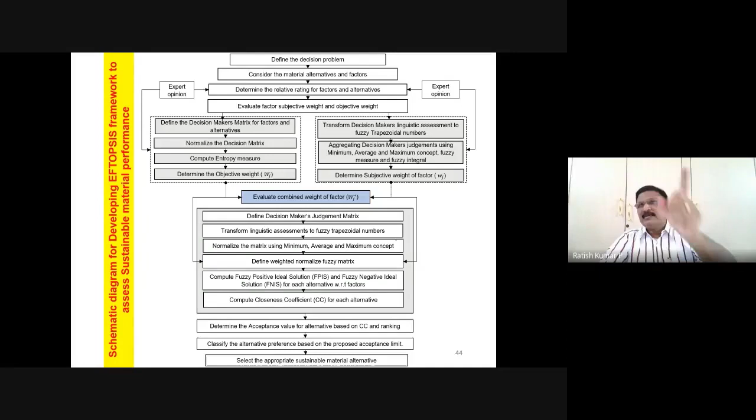In fact, we tried to work this on different types of materials, like geopolymer, slag-based cements, fly ash-based cements, and composite cements, and compared them with Portland cement. Then we do the assessment as to which can be the better alternative. That is the point of what I call the performance and justification, which I was telling you about.

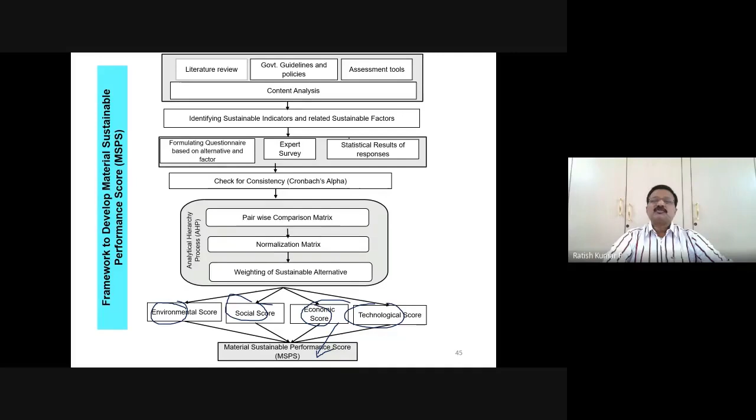And then finally, we get the score for each of them: environment, social, economic, as well as technology, and then we club them to get one score. We call it the material sustainable performance score. I'll try to show you that also. I think this is the index. I think I can skip it here.

I just want to say that in addition to relating the indicators and criteria, it is also important that we go through, one second, please. Let me just go here. Yeah, it's also important that we go through these three phases, which are nothing but the pre-construction, during construction, and post-construction phases, which I was talking about at the beginning as life cycle phases, cradle to grave.

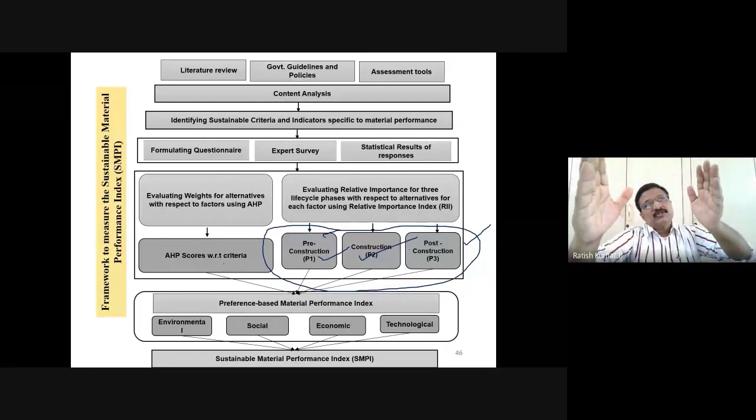So from pre-construction to post-construction, and then once again back to pre-construction by undergoing the 6 R's, which are nothing but the technological aspects. By including these three, I'm really talking about selecting a material, passing it through the different phases with respect to the different attributes, combining with different criteria, and satisfying the different indicators like social, economical, environmental, as well as technological. And then finally, I could come out with an index.

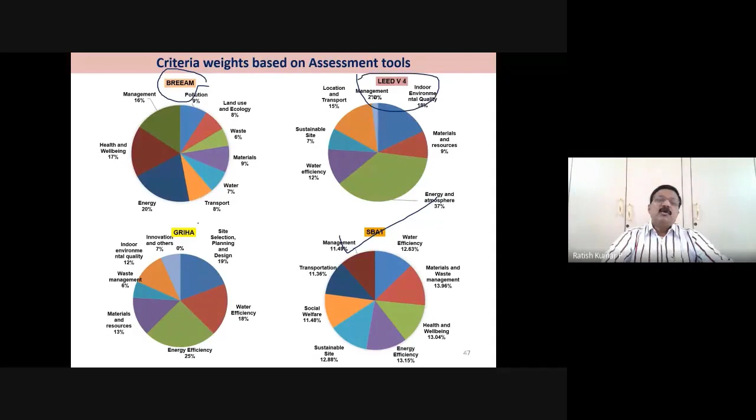So this is what we developed, and this is what is available. BREEAM from the UK, LEED is there, you have GRIHA from India, and you can see these different criteria are being judged differently; they have a different type of role.

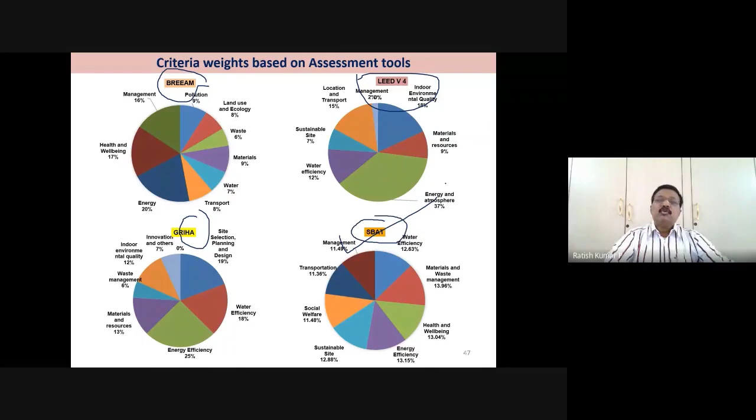There are some materials or criteria which are not really being properly weighed in GRIHA as well as LEED. We tried to have a systematic approach and then developed this sustainable building assessment tool. I'll try to show you. So these are the different criteria. This is a summation of that to get the sustainable score.

And then finally, just like GRIHA has different numbers like 50, 60, 75 or 100, we also tried to develop performance levels based on the building performance score we got, and rated them as 1 star, 2 star, 3 star, 4 star, and 5 star. Greater than or equal to 90 is 5 star. How do we get this particular point? Let me go to that.

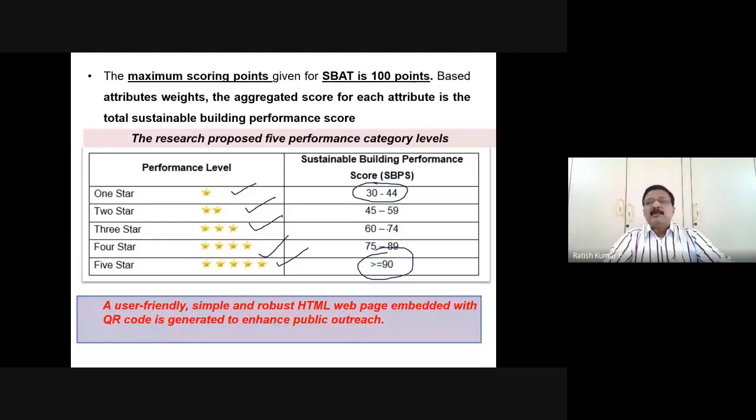As you can notice here, these are the 4 indicators: environmental, economical, technological, as well as social. And then we weigh them, and you can notice here it is 88.93. That means this particular building which was selected comes under a 4-star rating. So in order to make it more comprehensive, we developed a commercial application of this using a graphical user interface.

And as you can notice, there is a QR code in this. We are now trying to patent this particular thing. This QR code can be useful; you can notice here these are the criteria, and these are the attributes. So it combines all of them, and when I put this QR code on a particular building, I can simply read it and get the score. So that is the building assessment tool which we developed, and this can really have a good commercial application.

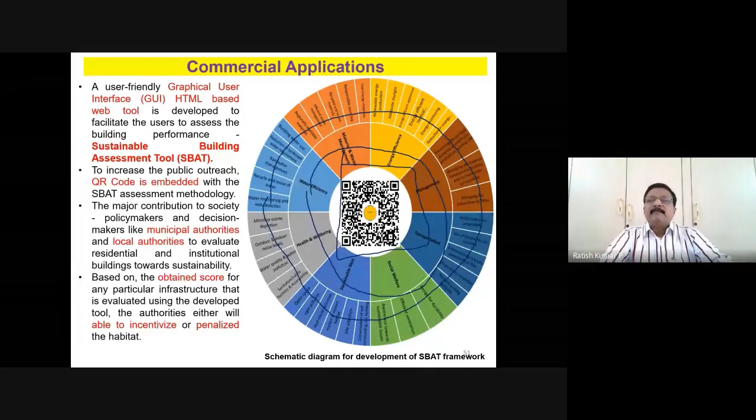And you can check ways and means of implementing alternatives, for example, a septic tank, a solar water heater, or the type of material they are using. So you can make a combination of that so that you can get a good score.

Now, to come to an end, I just want to ask: will we be lucky to see these days? As you can notice, because of this global pandemic, Earth Overshoot Day is fortunately coming to 22nd August, because there is a lull in construction due to the novel coronavirus. Earlier it was July 29th, and now it has come to August 22nd. In fact, it's good that our resources can last up to August 22nd.

That means we are really having a good amount of resources this year. Last year it was complete by July 29th. This time we have August 22nd, which is good news. But this good news is because of the lull in construction and the reduction in the mobility of people, and that's how Earth Overshoot Day has come to 22nd August.

But what I mean to say here is that this sustainability we are talking about should not come by disaster like what we have got because of the novel coronavirus. It should come by design.

That is what should be the aim of the budding engineers or young scientists as well as the young faculty, etc. And I'm just trying to check, can we really try to get a day where we can at least survive by reducing the carbon dioxide emission by 30%?

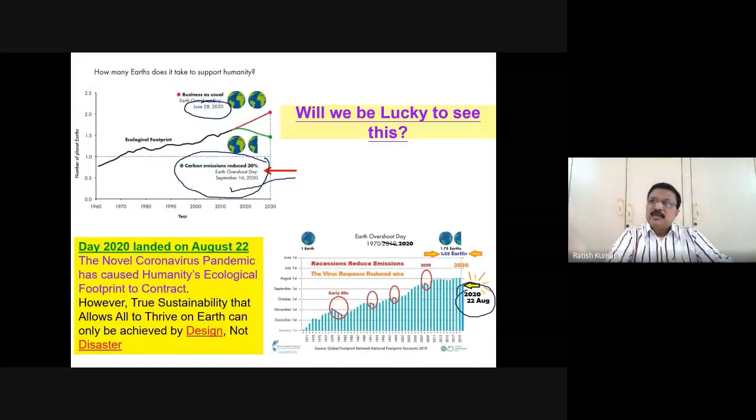Can I see a day where by 2030, this particular Earth Overshoot Day is further going to go up to September 16, 2030? Otherwise, if you continue to do the business as usual, the Earth Overshoot Day in 2030 will, I'm afraid, be June 28th, which means definitely by the middle of the year we are consuming all our resources. So this is my point which I want to say.

And finally, to close, I'll also try to bring out some of the points which are the way forward for budding engineers, scientists, as well as faculty members who are working in the area of materials as well as sustainability. I think at the end of this, I just want to say that we have tried to focus on the performance part of the different materials.

We have also tried to focus on how to assess the materials by using a tool which we have developed, called a sustainable building assessment tool. However, this is not the end because that tool is developed for residential buildings. So it's also important to develop such a robust sustainable assessment tool not only for residential buildings, but also for infrastructure, including commercial spaces, industrial spaces, etc.

And at the same time, I talked about the performance aspect. We try to understand the different types of materials, and don't just concentrate on fly ash, silica fume, GGBS, rice husk ash, metakaolin. There are very good materials like LC3, for example, limestone calcined clay cements, which you can think about. And then you can think about belite cements.

You can think about alumina-rich types of cements. As I said, you can go to the right side and, using a little bit of sulfur, think about calcium sulfoaluminate based cements, etc. With an overall idea that you should be in a position to reduce the carbon footprint. At the same time, don't compromise on strength and don't compromise on durability.

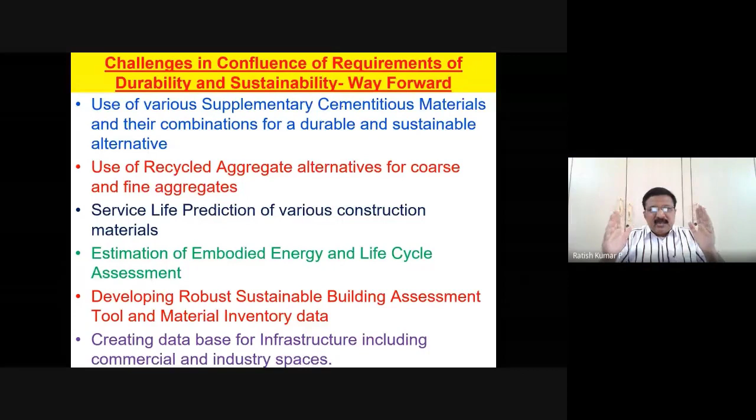And also think about the life cycle assessment, because it's not just important to only think about the material which is coming onto the site, but it should be thought from the pre-construction, during construction, post-construction, ways and means of recycling. Think about circular economy right from cradle to grave. I think this is a simple, I should say, triangular love story between strength, durability, as well as sustainability.